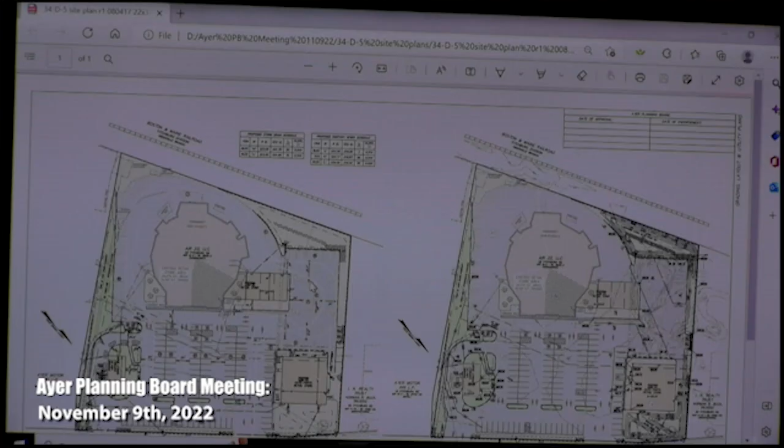Over the last several years, we've been keeping the permits alive, both the special permit and the site plan review. Subsequent to that, as this has kind of sat, we've gone through various renditions of what can we do with this property, since they walked.

One of the things that Paul had looked at, he really didn't like how this curb cut was positioned with the rest of the plaza and the flow. So he said, hey, can we change this curb cut location to here? I said, well, we can do that. However, that requires Mass DOT approval.

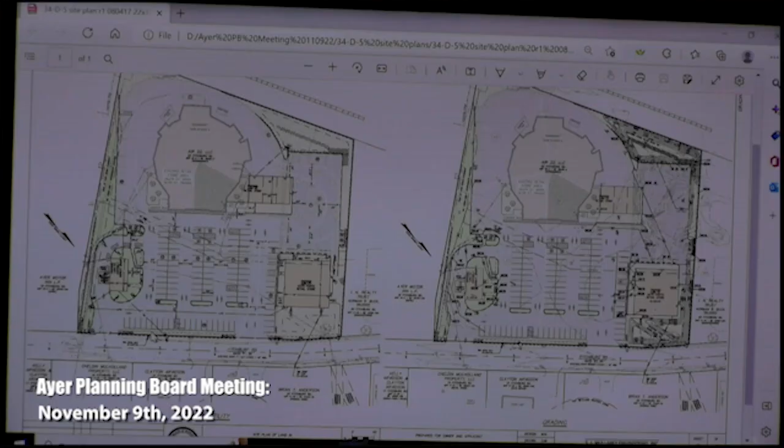So in January of this year, we reached out to Mass DOT, and this is what we had supplied to them. This isn't colored, but we had moved the curb cut location here, left the building, left the auto parts, and left the addition location.

Well, they came back to us with basically a huge laundry list of improvements they wanted done along here, and we started looking at it and got a little gun shy with what they were asking us to do. So I said, well, can we go back to the original proposal?

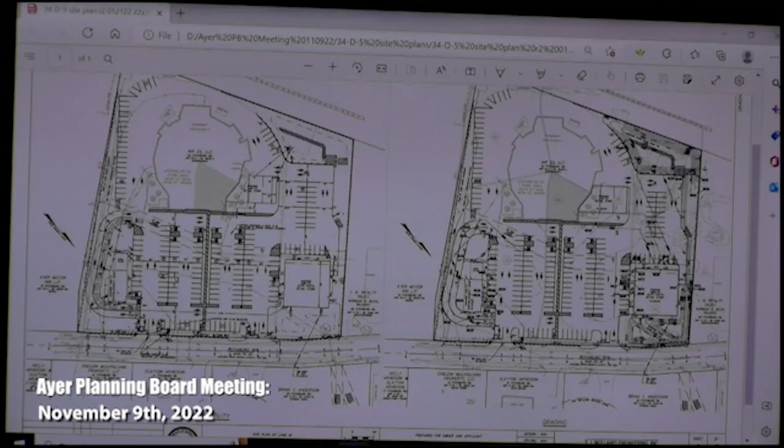So we did that. They said, well, that's fine. However, we need to show it without the drive-through building. The reason is there's an existing drain line that cuts through this property and ties across here. They wanted us to address this drain line before doing anything with this drive-through building.

That's why we approached the board, and kind of administratively, can we phase this project? Since we started, Advance Auto came back in the picture, they wanted this location, can we get this moving, build this portion of the project, put that on hold until we resolve our issues with Mass DOT.

And Mass DOT wanted to see it specifically on a separate plan. They wouldn't allow us to just X out a building not to be built at a later date. They wanted a separate plan, and that's the plan that we presented to you.

This plan tonight, you mean? Yeah, well, this is the phased one. Phase one was this one. Yes, this is the phase one that we have.

I'm just kind of giving a backstory because Member Diskin and Member Tilson were part of that discussion. Does phase one include the retail stores to the side of Shop and Save? Phase one was for this side, yes. Okay.

Is that in progress now? Yes, that's being constructed right now. This portion of it is being constructed. Not the strip area, that's not under construction now, but that's considered part of phase one of this plan.

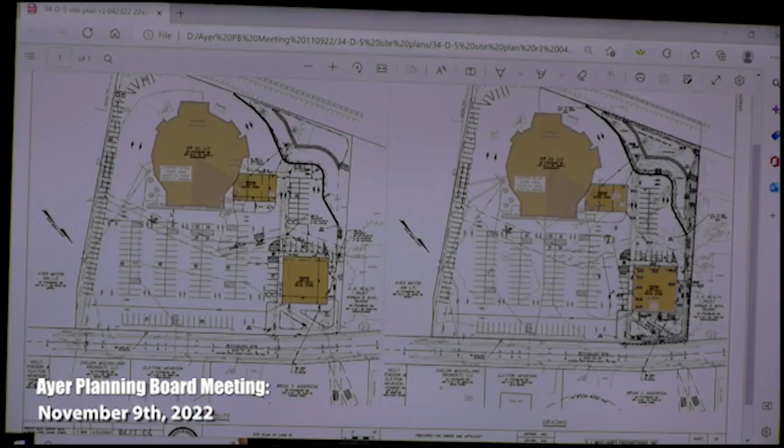It's that same stormwater basin I was just pointing at, the same sewer line, but we are permitting this curb cut change and then the parking configuration, because when we did this in 2017, there was the 2009 zoning, and the parking dimensions, parking setbacks, all your landscaping requirements, all those were different. And even the board members, which boards we're were, this had a mix of a zoning board approval and a planning board approval. Those are now under your purview for site plan.

So this curb cut location -- Mass DOT did not allow us to have the sidewalk. Previously, the sidewalk was shown on our side, on our property, on the Locust property. They wanted us to continue that sidewalk in the same fashion that currently was added in front of the Ayer Motor Inn, and that is right on the edge of pavement.

So that resulted in the introduction of additional curbing, and it also requires retrofitting. There's existing drainage structures, utilities here, an existing catch basin located here. We now need to retrofit that, convert it into a manhole, and have a curb inlet offset going in along here.

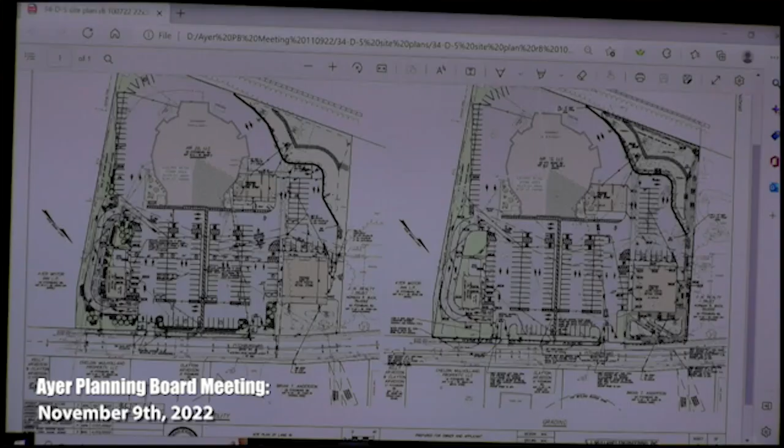Now, Mass DOT isn't requiring the sidewalk, but they said if you provide a sidewalk, it must be in our right-of-way and not on your property. If it's on the applicant's property, it's a long-winded process to get approval -- to get an easement and cross-cutting easements. They do not want people to walk down their sidewalk and then come onto an abutting piece of property and then back onto the right-of-way.

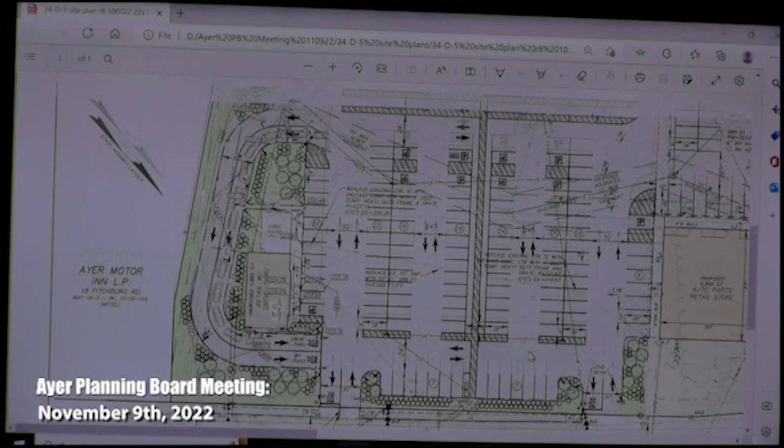So now what we've done on this plan is show the density of what the landscaping is required for the town. And we've augmented the parking spaces from 10 by 20, which was the previous, to now 9 by 18. Since we had to put the sidewalk here, we figured let's balance this out from an aesthetic perspective with the centering of the site. So we're going to put a crosswalk painted through the center of the property.

And that really corresponds to the grade, you can see there's a high point running through. These are the contour lines here. And here, so there's a bowl right here and there's a bowl right here in the parking lot, which those two catch basins connect to.

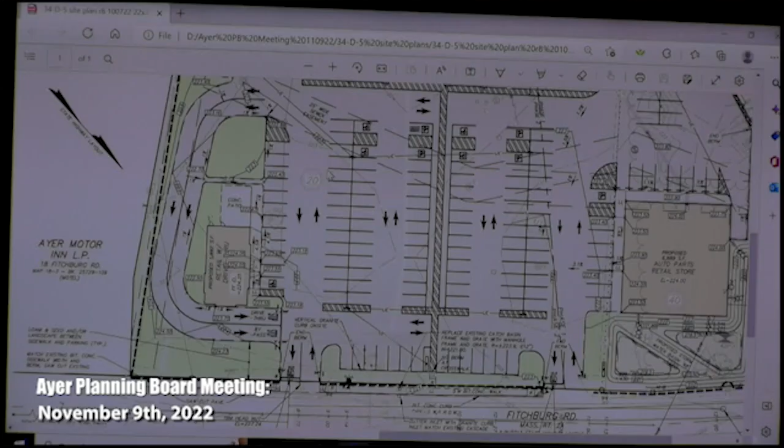Now, consequently, with changing the parking shape, the parking grid, and the parking spaces changing, that affects the positioning of the poles. Currently there's an existing light pole here, there's an existing light pole here, there's one... it's in there somewhere, right there, and then right in that area, right there.

So here we're proposing to put new light poles lined up with how the parking grid's going to be, and right here and right here. Being cognizant that there's a sewer easement that comes through here, and also the town has a sewer easement that goes along here, the main trunk line, and there's overhead wires, power and utilities going through there. So there's kind of a spaghetti of utilities going through the property.

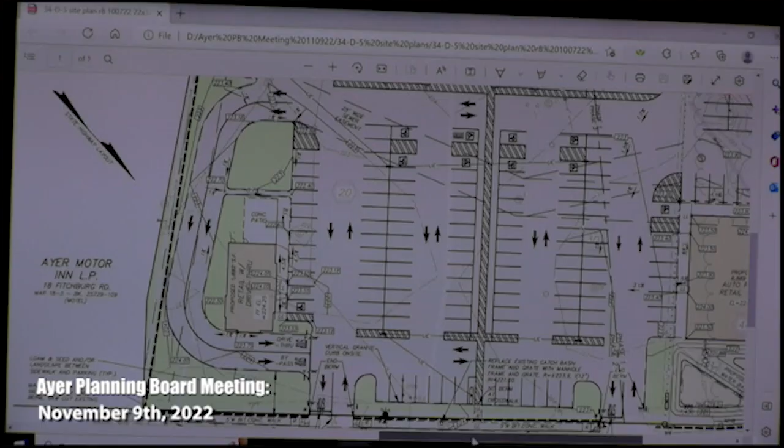So with the sidewalk, and this is another thing, MassDOT did not want a radii there. They did not want a 30-foot radius there. They said this is their preferred layout. That's not cool, but that's how they want it.

Is that about trucks and stuff like that? Well, it's a 30-foot radius, this is sloped, there's going to be a transition detail, and you see how they do it throughout the state, they ramp down, and that's how they want it. So you're telling me that a long tractor trailer with a delivery can come out of that and make a radius onto the highway with that sharp 90, almost a 90, there?

I'm talking about this right here. I think, Ken, if I may, Mr. Chair, the LL, that's sloped bituminous down to the level, that's for the sidewalk, so the truck can roll over the sidewalk without damaging it. I'm seeing it in other places with the advocacy work, yeah, DOT's made some changes. Previously there was a 30-foot radii, and that's what we had, and they said no, we don't want to see that.

Wow. Can't turn south. Well, the good thing is it is fairly wide, as a lot of the streets in Ayer. This is a very wide street, so. And are they required, sorry...

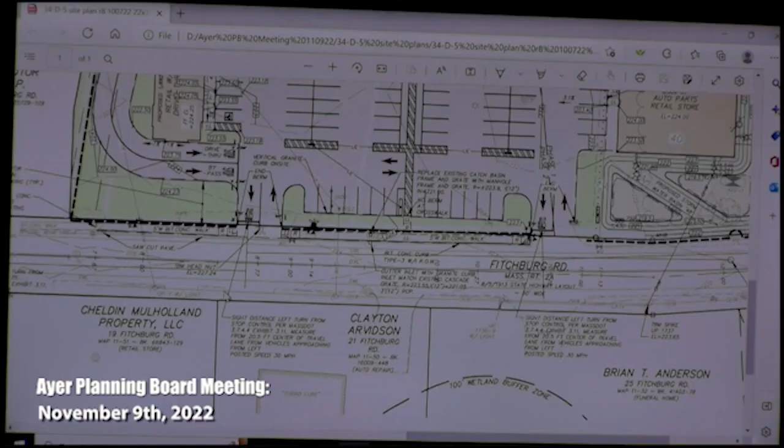It's a quick question, will you be repaving the parking lot as part of this overall project or no? It will be, once we get it, it's being done in steps and phases. It needs a quick patch, it needs to be redone, and that's kind of what really started it, they were hoping to actually do it this year. Let's get our ducks in a row.

The plan is to repave the parking lot next season, change the exterior lights. So we are focused to do that actually next July. Okay, thank you, wow excellent. Yeah, you've lost the season this year. Did they... excuse me, UPS Auto Parts being done this week.

Did Mass DOT require you to put in vertical granite curb as you meet the road? Match what they have, because right now they're doing bituminous. So match the curbing. On the site, once we get in here, we're doing granite within the site. But we're matching what they have here, their curb and sidewalk.

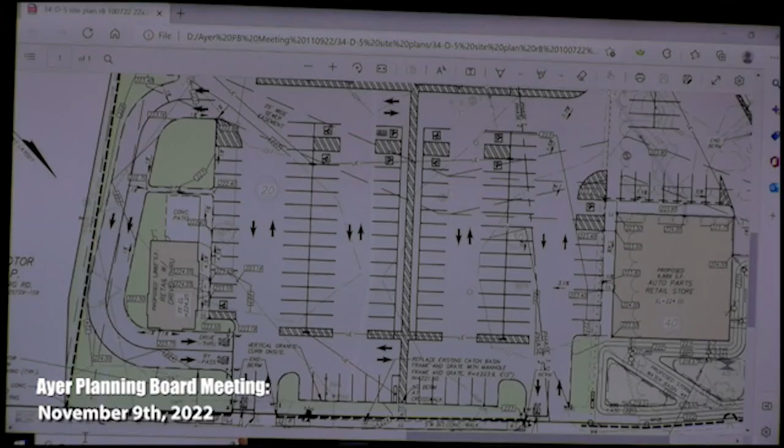Yeah, and they went out and that was a pushback. They initially wanted us to do granite, but I'm like, it's bituminous. Then there was some back and forth, because they were just looking at Google Street View and it looks like it was granite curbing, and I'm like, no, it's not. So some pushback on that.

I was going to say, I'm going to keep going. I was going to ask some questions at the building, but we're down in the front for now.

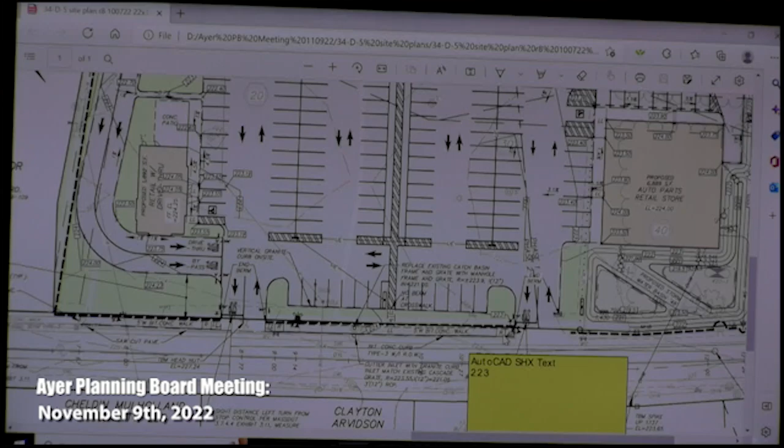Currently, I'm going to slide over to the other view. It just shows the utilities. These are the changes that Mass DOT wanted us to do. They wanted us to retrofit these existing catch basins that are out here with sumps. And actually, the structural integrity of them, that's starting to...

It's unhappy too. What was that? Who knows? Start again. At least it's not talking to us. I don't know what that was. New Acrobat feature. I don't know what that was. Yeah, who knows?

So where was that supposed to be? The retrofit on the sumps, you're adding sumps and retrofitting catch basins. There's a catch basin here and here, which we're retrofitting, adding a deep sump.

They had us go through their litany of various LID options and all the permutations of what can be done. Based on the elevation of the site where the groundwater table is at on that property, it's very flat, very shallow. Implementing all the LID techniques, you really can't do it. But what you can do is reduce pavement, which we've done, and introduce the deep sumps with the oil and sediment trap separators.

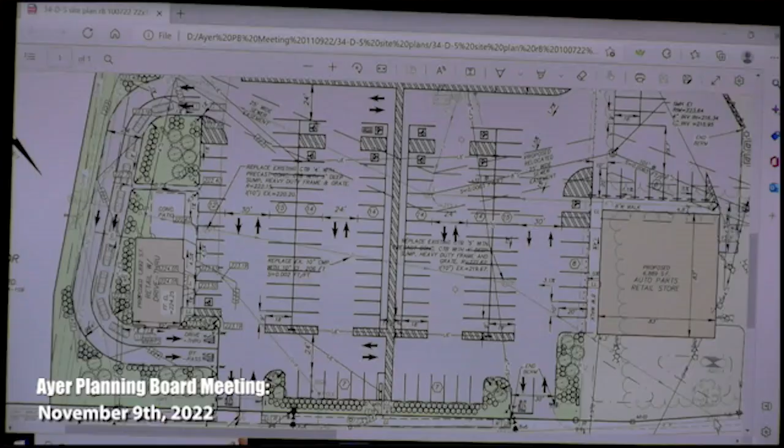We had to apply for a separate permit for that explicitly, and it runs with the property. It's going to be recorded and be basically part of their deed. When title's done, that drain can exist. So that's separate from the actual curb cut application, but we made all the improvements onto one plan. They thought that would be best, to just have everything we're proposing to do on one plan.

And so they're asking you to put sumps in, gas oil separators in the sumps. Yes, so you're introducing the cleanest water you can off the property into their system, and they probably gave you a maintenance requirement. Yeah, there'll be their maintenance, because of their MS4 permitting and their EPA standards, and one of the things that... yeah, so they were satisfied with that.

We went through the various options. There was some back and forth on what could be done, and we showed how much pavement we've reduced, and they were satisfied with that. Even implementing additional structures out there, like Stormceptors or oil water separators, the problem is the height of the structure, and actually getting it to physically fit. Even these structures, we had to raise the grade a few inches just to get a retrofitted precast structure put in, because when this was built in the 50s...

It's probably barrel block, they paved it as they left. So getting a modern precast structure and frame and grate, we had to raise it a couple inches, but really we're limited ultimately by the final discharge point, how much we can raise the site.

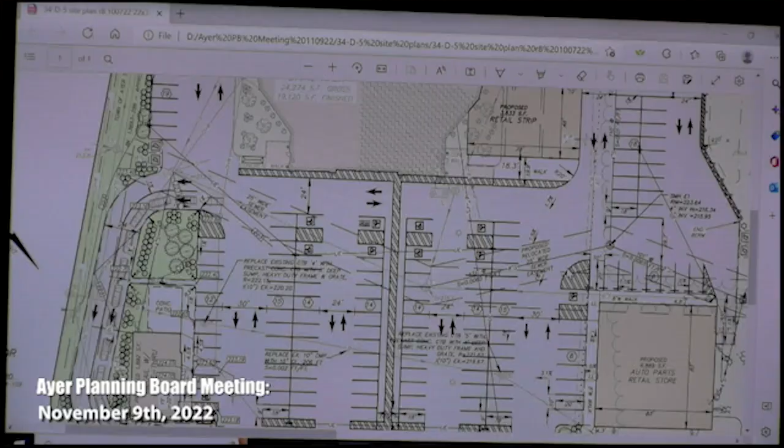But not this, what you just described, the requirements to change those. Yeah, and DOT was satisfied with the basin in the back, that it does not impose anything, nor would it be a benefit to them for dealing with the drainage issues and the drainage woes that we have on the site and the surrounding area.

Can you take us over to the slide that shows the retention or detention basin, by the auto parts store? Because I'm looking at the drain line you just showed, and that drain line is low to that work.

Because it goes right across, in the other drawing it went right across that. Yeah, it's going right here, there's a little hump there. That's to cover that pipe. Everything is shallow. That's why that high point is in the middle, I was curious about that.

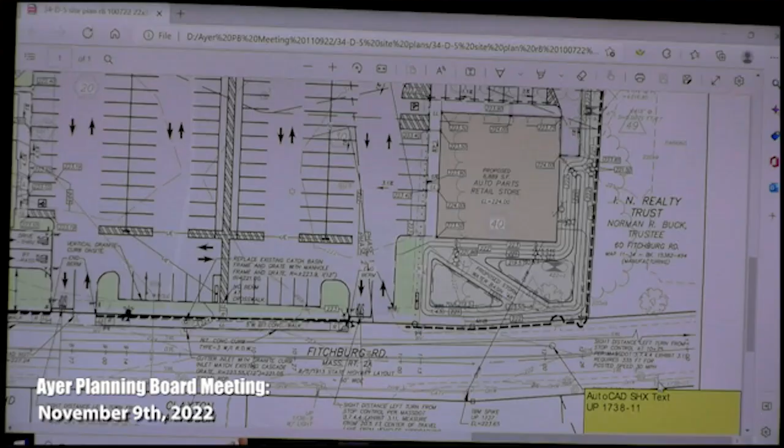It's very shallow, and what that area is doing is basically just catching the roof runoff in the front. In the back, all the parking lot and pavement is sheet flowing to the back. So the connection where it says RD up on the back is the roof drain coming into that.

Initially, the older information we had said this used to be a clay pipe, and over the years that's another reason we were really concerned. When we went out to do some measurements, we realized it's actually a cast iron pipe, so it's really shallow but from here it's cast iron. That gave me a little more comfort that we're not going to crush that pipe as we're putting that building in. That was one of our concerns.

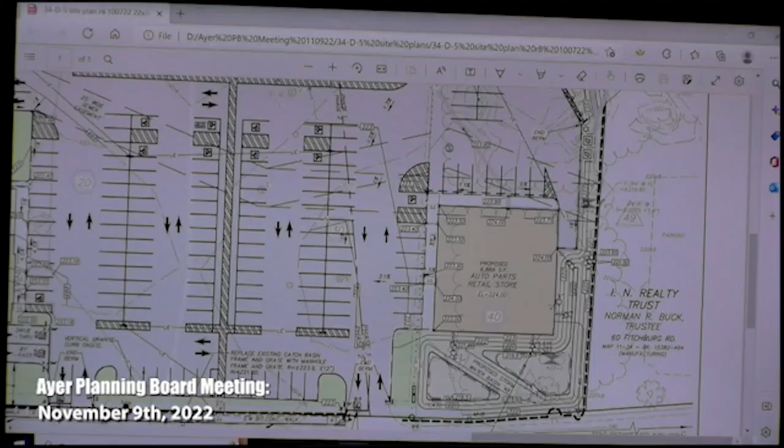Can I ask a question about the back of the property? As I recall, when you guys were here way back when, one of the things we talked about was snow storage during winters, though we're not getting a lot of snow now. But I don't recall what it was back there, but you're still maintaining the area back there as was requested before for snow storage.

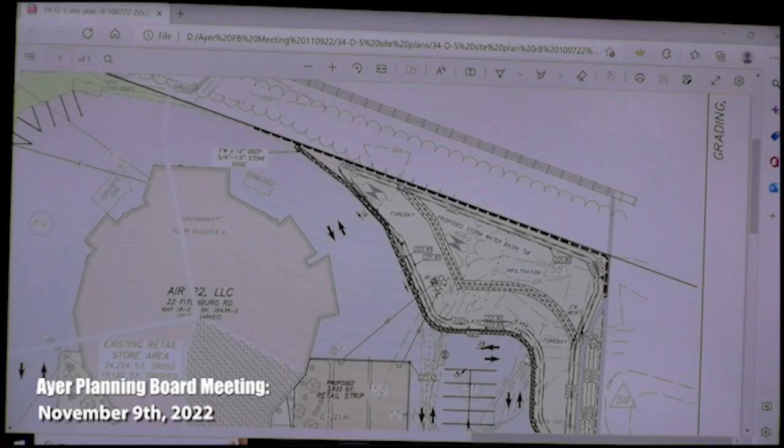Yeah, and usually what they end up doing is leaving areas as they plow, since we have more parking than needed, so they sacrifice some parking areas. I'm just curious because if I recall, that back right-hand corner was the area selected for snow storage in the original plans. We talked about it. So nothing you're doing is going to impact that. No, you're not putting any fences or anything like that there.

Thank you. Should I go?

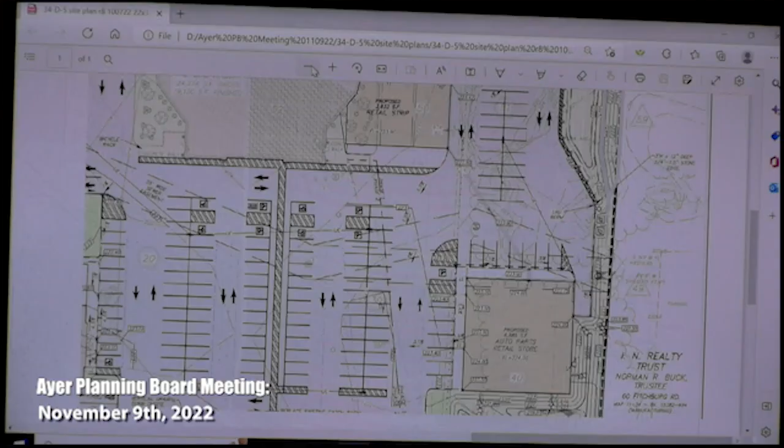Is he complete, Mr. Cooper? Did you have more? No, I saw the memo that Mark had prepared, summarizing the before and after from 2009 zoning to 2019 zoning, with impervious coverage, open space, and parking. The parking is a range - previously we had 166 parking spaces, we have 169 now, so three more than before, but they're smaller spaces, which accounts for that.

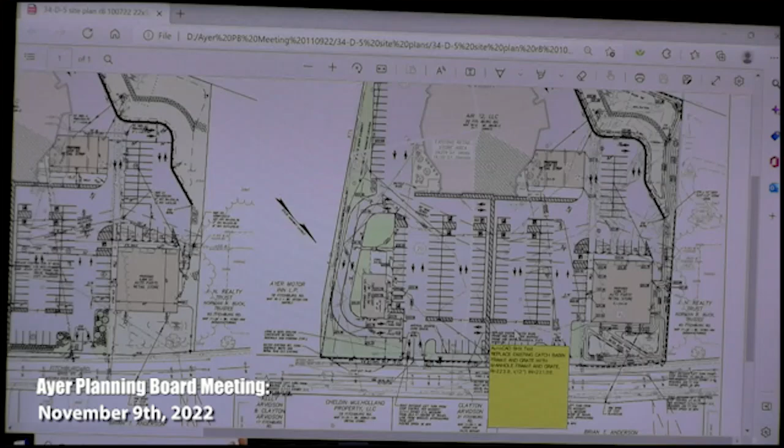And our overall pavement footprint is less than before, based on the stormwater basin becoming larger, and the landscaping and how we did this curb cut. This is all pavement today, so that'll be all landscaped with less runoff into their drainage system, which they were happy about, since it's a sandy material in the area, really conducive for recharge.

Okay, Mr. Chair? Yes, please. A little bit of process. First step would be for the planning board to accept the application package for consideration. The checklist is right in the packet I sent, very thorough as always. I recommend acceptance of the application for consideration first. Then we have two potential waiver requests, one of which may now be moot, which I'll get to after the acceptance motion. And also recommendations from Dan Van Schalkwyk, DPW Director, that may affect the outcome on the conditions.

Mr. Chair, if you want to move to accept the plans as presented? Excellent, do I have a second? I don't have the paper in front of me so I can't give you the actual address. I think it's 22 Fitchburg Road, site plan approval modification. I printed it up but left it behind with my notes. Do I have a second? Seconded, thank you, Mr. Disco. Any discussion?

Hearing none, move to vote. Wait a minute, this is a public hearing, isn't it? This is just to accept the plan, not to approve it. I have one question when you have a public hearing.

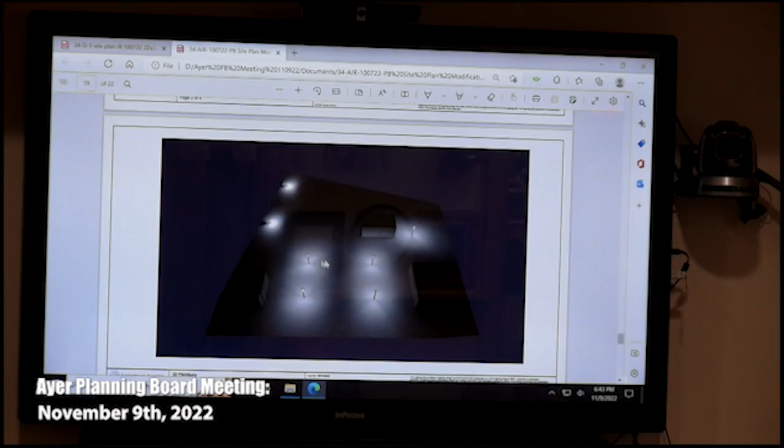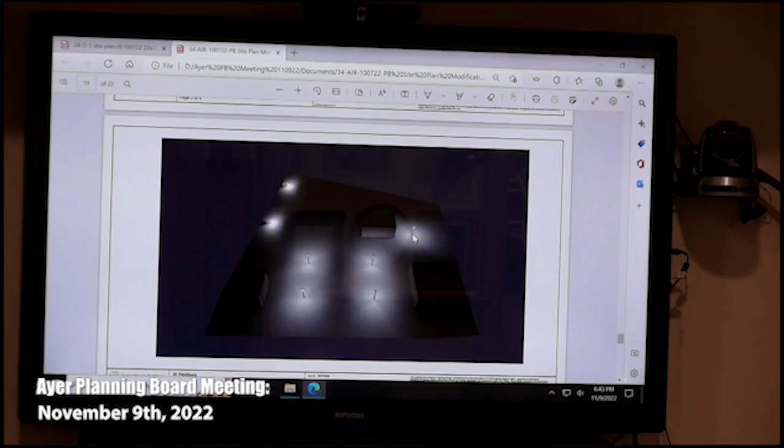This is just to make it clear. We have 4 30-foot light poles here, and we're looking to reposition them basically. That was only, well, it's technically a waiver to do that. The other poles on the property would be 15 foot on the edges, but replacing the existing tall poles with LED. The poles that are out there now, you can see the bulb, just the style of fixture, the current lighting, it's more shielded, more directed down, so you're not getting the off-spill. So it will be dark sky compliant. Correct. So the only issue is 15 feet versus 30 feet, 30 feet is where it currently is.

So you just said you're going to reuse the poles, but you're going to change the fixture heads, basically, that's what's going on, right? The lighting heads themselves, or are you just going to convert them to LED? Well, I think you'd want to, there's over 60-year-old poles. So everything's getting changed? They're going to get changed, correct. I thought you said reposition the poles, but I guess you didn't. Reposition where the lighting poles are located. Got it, the base is going to be scrapped. So it's all new stuff? It's going to be new, but it's going to be matching the existing height. Yeah, got it, thank you.

And there's 4, part of your discussion was the fact that there's 4 light heads on each one of those poles, right? Correct. And now they're going to be with the LED light panel, there's going to be double heads. Okay, thanks. So it's actually a reduction in actual light heads, but just the efficiency of the light. So those are going to, what we're seeing there now is only 2? Double heads, yes.

This is showing the lighting, though not the lighting that goes around. There will be wall packs, wall storefront packs lighting, and shielded down wall packs, though it doesn't show the grocery stores with the glass front. This is just to give an idea what the new lighting will give, though it's not the complete picture. These are the new structures, basically, and showing what the new proposed poles will do for electric.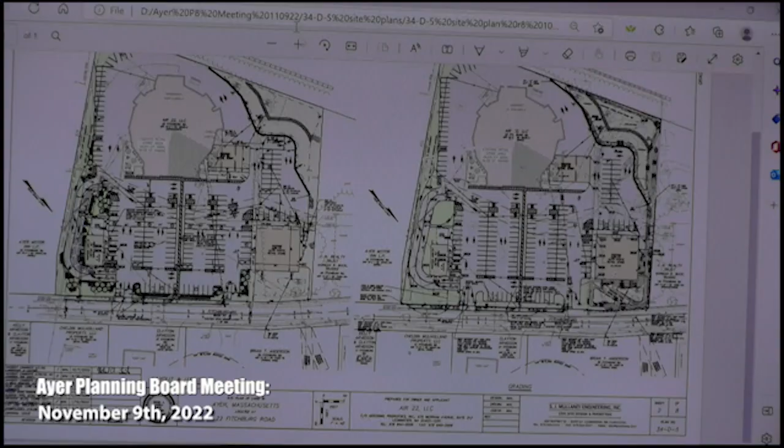We have numerous existing utilities. There's currently a sewer easement coming through here with a sewer line, and there's also a sewer line in here. There's an existing fire service line located here which ties into this corner, which we're retrofitting and moving over.

Once the addition goes in, I don't know what that thing is. It's not working right. Is that an internet problem? You gotta have some fun, Mark, or we're not gonna stick around. All right.

How am I getting... let's see here. Plans. That's okay, we understood that. Back to there.

Oh, I remembered it. So we have an existing drain line that runs through here, and we have existing sewer lines. If we put more poles out here, it becomes problematic with the existing utilities. We'd have to double the amount of poles out there, maybe even more. That's additional cost on top of the improvements that Mass DOT is requiring us to make in their right-of-way, which they're not compensating us for. So we need to introduce sidewalk and curbing and retrofit the structures where they want them versus where they are now.

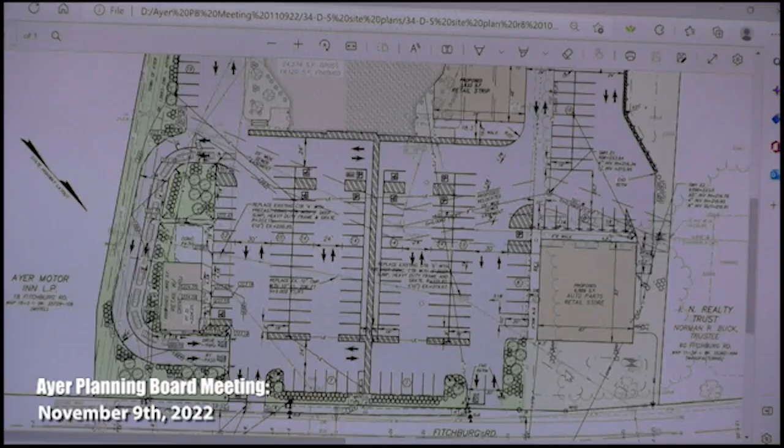The town ordinances apparently require a shorter pole. Do we really have a real need to go to something that tall, which is atypical of the town?

I'm good with it. Well, I think there's a little confusion here. We're not seeking a waiver, it's grandfathered in, so that waiver really is not needed.

That said, we do have a motion to vote on this waiver. There's no need for a waiver because it's grandfathered in. Right, though I think Jeff made a motion.

If the waiver was in the papers, if it is at the desire of the applicant to withdraw the request for the waiver, I will withdraw my motion. No, I wouldn't do that.

I'd say, Mr. Geronimo, that a waiver would be granted if there were no change in the poles, if they stayed in exactly the same location. But I think we're good with the discussion we're having right now. I think the town needs to decide if we need a waiver or not. We were told it's been there since 1956, and that it's standard in Ayer codes, that it's grandfathered in.

Mr. Chair, to speak to that, it's a better product having 4 poles instead of tripling the number of poles. This property is going through a major redevelopment, and it is a better project for that corridor than it currently sits. We're only asking for the 2 waivers. We're now having less light pollution than the current lighting that was there in 1956. You walk by there now, you drive by there now, and the bulbs are open. These are directed to a certain spot.

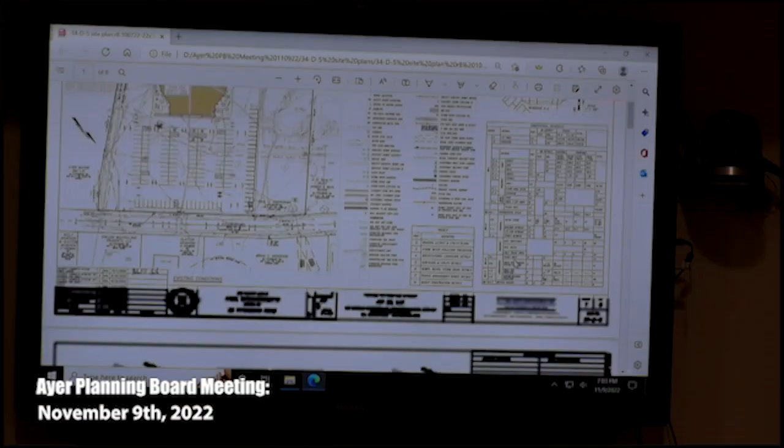Previously it was very benign what we had. Now there's a density, there's a number of shrubs. It's a planting list. The current zoning requires...

The current landscaping requirement is one tree for every 10 spaces, and there's 98 spaces, which requires 10 trees. For frontage, it's one tree per every 25 feet, and we have 358 feet of frontage, so that requires 15 trees. Shrubs and bushes are based on 12 per tree, so with 15 trees total that results in 180 shrubs spaced throughout the site.

So we had a greater density previously. We had 20, and we're now at 27.

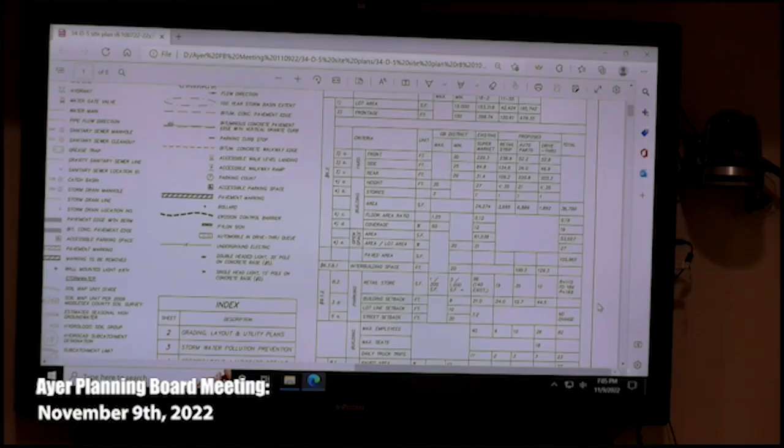So the section you're referring to is in the zoning bylaw regulations, right? Section 9, yes, general regulations, 9.1.9, I think 916 or 9.17 — yep, okay, here, thank you, I got it.

Mr. Chairman, can I just ask, the 8 bicycle spaces, are those near the main strip, or are they at the auto place as well? Just curiosity, I don't want to derail our conversation. I placed them up here.

Because with the phasing and the contract we had, the negotiations were phased with AutoZone in agreement with an approved plan. Then as we discussed earlier, once we went out there to satisfy some abutter concerns, we had to make some retrofits.

I won't have to lock my bike to the bike corral or any tree further anymore. Discussion from the board before I open up to the public?

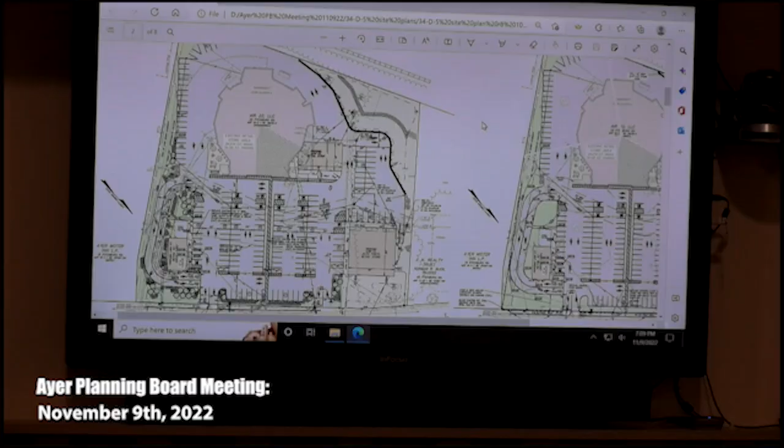Yes, Beth? I definitely support strategically locating trees within the parking area to reduce that heat island effect. It's a very large parking place. I certainly appreciate the extent to which the pavement is being removed around the perimeter. It's quite an eyesore right now, and this will be a significant improvement. I certainly acknowledge that and appreciate the effort that's gone into the design. But I do really feel like it would be a huge missed opportunity if we don't put some trees within the large parking area. I also would like to see another - I believe right now, next to the sidewalk at the roadway, it appears there are 2 street trees in that inner island between the driveways, but I really think a third located in the middle there would help a lot as well. And maybe I'm not looking at the plan accurately, but I only see them kind of at the sides close to the driveways and not in the middle stretch along the roadway.

And then I also think that there's really a need to buffer the stormwater basin from the roadway. Right now, the grading is completed there and it's just not an attractive view at all. So I think there's a lot of potential for adding some shrubs at least along the stormwater basin area between the roadway and the basin. That would be a tremendous improvement aesthetically from the roadway. And it's something that we can see right now already, the circumstances there and the omission of any landscaping in that location on the plans before us tonight. So just a few thoughts.

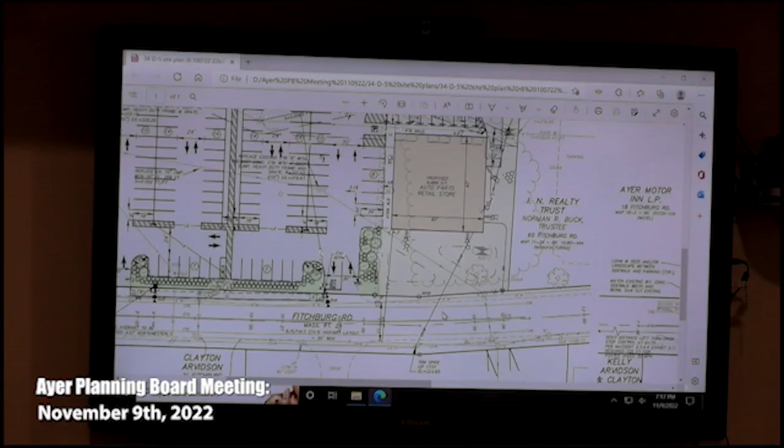Mr. Chair, if I may. Yes, please. So I'm the liaison to the Affordable Housing Trust for the Planning Board. What we're looking at, and what the town unanimously voted on October 24th, was money CPC funds for phase one of a project that will have 102 units. They'll be mixed 1, 2, and 3 bedroom units.

They will be adjacent to the Anderson Funeral Home project. Yes. They're going for funding in the next 6 weeks. We hope that they will get funding in this round and that within the next 24 months they'll have 60 units built.

So you've got 60 units of people coming to your store. So if I can say something like, maybe we could find a couple bucks to move a gate valve, I would put that plea out there, please.

And it's a condition that it's agreeable to Mass DOT. Well, I understand it needs to be agreeable, but we're building housing in this town hand over fist, and it's right in your guys' front yard. I appreciate that it's cost, but this was not even on the horizon in 2017. No, there was no sidewalk in 2000.

This has drawbacks in some people's eyes. It is an improvement in others' eyes, and we're doing stuff farther up the street from you, where those units are going to be there forever if the project goes forward, and we're working hard to make that work. The town put almost $500,000 down on the table the other day for them.

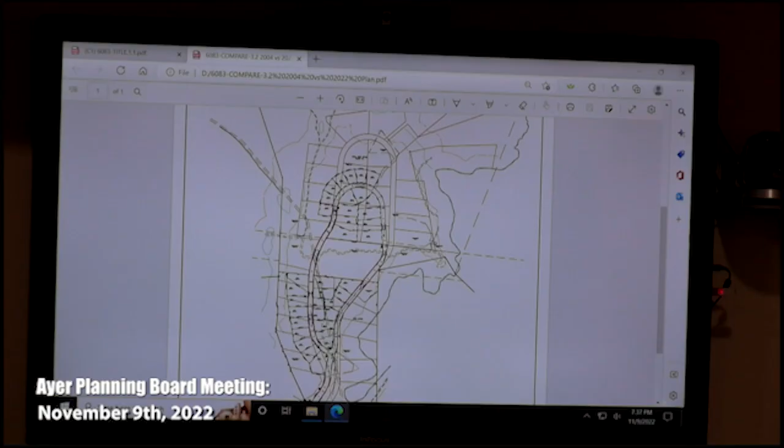I think they took an enormous amount of time discussing this with the reviewer they had engaged, and also took an enormous amount of time walking the site and reviewing the material we submitted. I respect their opinion, but I think this design is a pretty good compromise and also speaks well to your bylaw. So that's our feeling on it. And again, it's very subjective.

Bob and I actually met with Lauren at Natural Heritage yesterday and talked about several things with the site. One thing we discussed was the power line easement, and I know one of the points in the report was about protecting that easement because it's a wildlife corridor. She agreed with that, but didn't see the need to do anything specific like a wildlife tunnel. She didn't feel anything like that was necessary.

She agrees that habitat and wildlife will go back and forth across there, but with the limited number of lots, she didn't see it as rising to the level of needing specific protection for wildlife at the power lines. Did you get something in writing from her about that? No, not yet. This was just a meeting we had yesterday, actually going over turtle nesting areas.

Before we see you next time with the definitive plan, we'll actually have submitted for a modification of the CMP based on the preliminary plan, so we'll have something in writing from her at that point.

On that subject, we did speak with her about the turtle nesting areas and identify a place she thought would be appropriate, which would be up about where that triangular shaped area is, wouldn't it? Right up in that general vicinity, yeah. Right up in that general area.

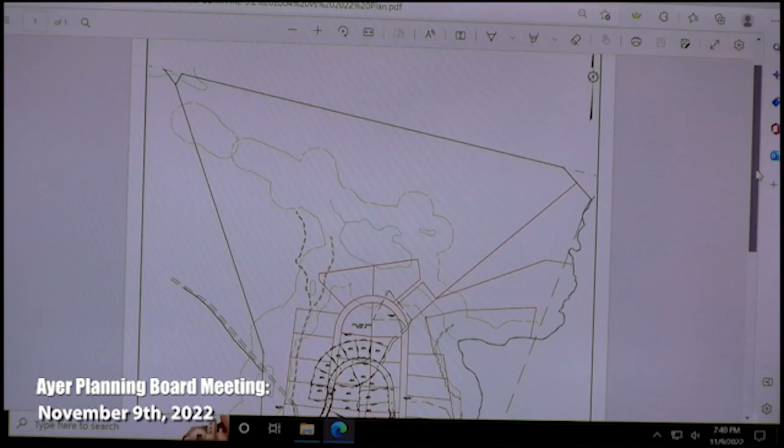The other thing, and this is a pedantic point that'll be interesting: the back area, the substantial acreage, is intended to be gifted to Mass Department of Fisheries and Wildlife. I'll actually probably put a declaration or restriction on it, but also an easement to enable the Ayer Conservation Commission, assuming they're amenable, to have a maintenance capability of that turtle nesting area that we would actually then endow.

Okay, but I'll talk to the Conservation Commission about that also. We'll resolve that before we come back and see you with a definitive plan.

Mr. Dills, did you want to add anything? No, I think Bob covered most everything.

Ken, I just want to double check, is this a plan we've had before? This is the comparative plan he prepared as a comparison. I thought so, but I also have the summary composite plan. I didn't copy every single plan sheet onto mine, but this is the actual plan.

And the power lines we're talking about are now bisecting top to bottom. Correct, north is to the left and south is to the right. Got it, okay.

So one of the issues that Concom raised — you want me to go back to the other one? Yeah. So one of the concerns they raised was over here, protecting this area because this is where the runoff would go to Long Pond. But in your revised plan, those lots have been removed, so I'd say that's moot at this point.

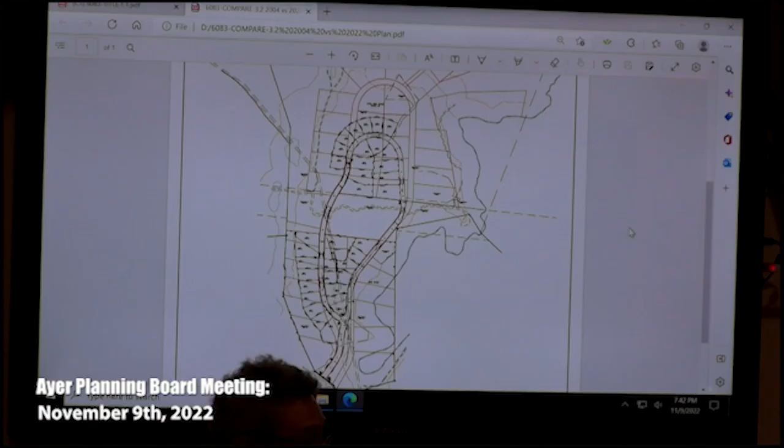That's right, so the area of greatest controversy that I see is really the issue north of the power line. That's where I think is the heart of this. And you earlier articulated that trying to squeeze these lots down here would put you all the way back.

Don't touch it, you can't get close to it, Jan. Can't even get close, I'm sorry.

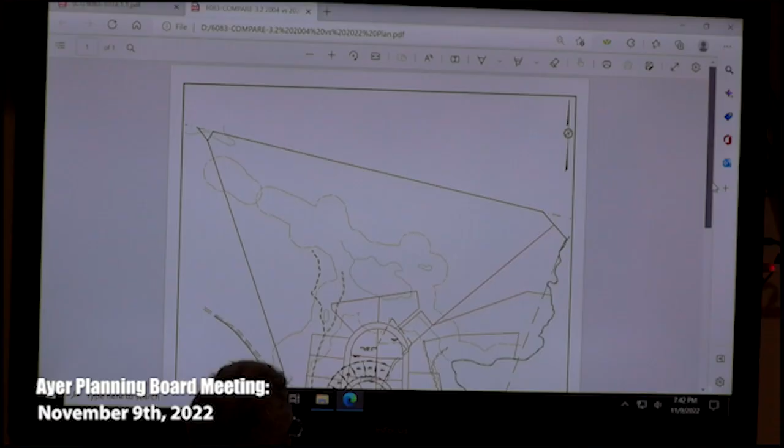So just vaguely here, what does that mean — building more lots here, and on the right, on the pond side? Well, no, we don't want that. In fact, that's one of the conditions of Mass Fisheries and Wildlife, not to build over there.

Right, those are not to be built over there, that's correct, it's in the Conservation Management Plan, at least the original. That was the part south of the power lines, but they never addressed at that time north of the power lines. Correct, I'm talking south of the power lines. Okay.

And there's difficult topography on the left-hand side too, as those lots are deeper, it drops off quite a bit. There's a lot of ledge, very challenging to walk over there, requires blasting and things like that. Very steep. So as I say, I do believe it's a compromise. And there's a wetland, a brook there as well, or an intermittent stream, I guess.

Did the board wish to make any further comments before I open it up to the public for any comments or questions they may have? Okay, yes, Ken?

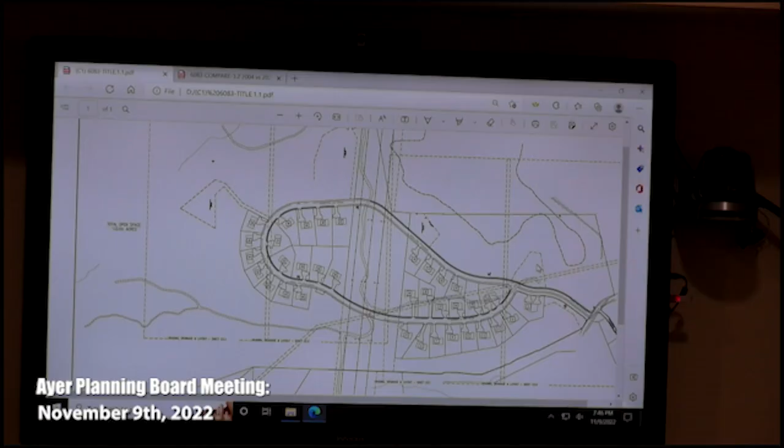As Bob said, once we know we have a configuration that everybody's happy with, we will go back out and do soil testing to find those places. Anything we can do to keep it as close to that side of the road as possible, or on the other side of the road, we intend to do. Okay, thank you.

Any other comments from the public or questions? Mark and then Marion, but Mark had his hand up first. Mark Phillips, Mount Laurel Road.

With regards to what we just discussed around trying to keep everything off that side, the west side of Long Pond, and any runoff - I think it would be highly desirable, just as the lady in front of me was requesting, to sacrifice a lot or whatever just to move that onto the other side of the road. It almost looks like a one-for-one spot from where it currently sits to the lot right opposite it. You're sacrificing one house, but keeping a pristine lake in good shape.

Unfortunately, it's not as simple as that, though - it depends on the soils. Everything to the west side of the road going in is very ledgy, solid rock. As you drop down and get closer to the pond, the soils get better and better. So everything inside the circle there is pretty much ledge, or very shallow soils. So it wouldn't be suitable, it just wouldn't accomplish that.

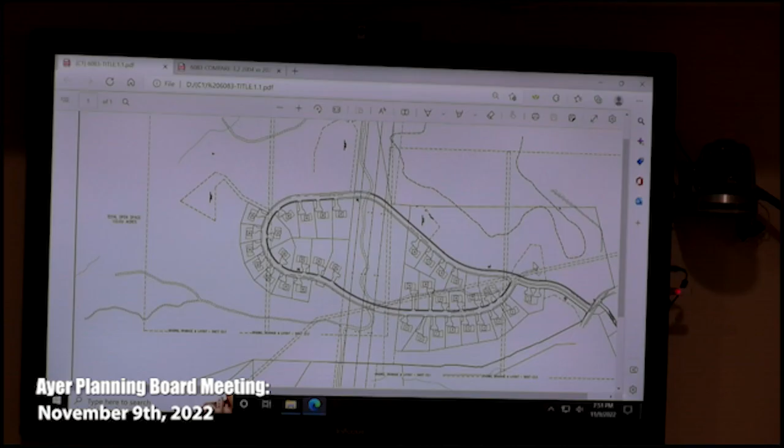Okay, could I say one other thing that might alleviate some of the concerns too? You know, those drainage areas are actually lifted off of the prior definitive plan, which had a lot more road, so a lot more impervious cover. But they happen to be areas that we know had already testing that was suitable. So we're certainly going to look at it and see what we can compress a little bit further, given that there's less impervious cover with this plan.

There's probably about half the pavement, because this is much narrower and a lot shorter. And the former requirements were for much wider pavement, much wider road, and I think it was longer, 46 feet I think. So just the changes that were made have reduced the pavement.

I'm not going to jump on your side of the game right now, but the smaller lot size also makes a lot less turf, a lot less runoff on turf. I'm hoping to see more extensive shrub and tree for holding water as best as we can.

Thank you, Mr. Chair. Again, low impact development. My second question then was, has New England Power already been approached about the crossing of the right of way? Yes, on multiple occasions.

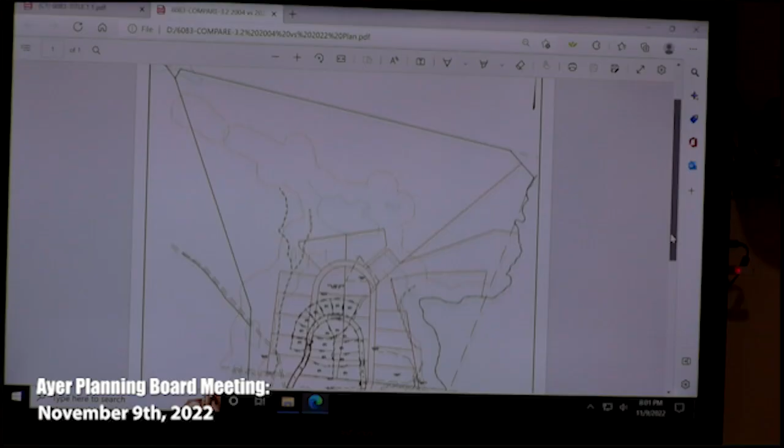You have to assume that you look at building a realistic subdivision road, which they extended up into this open space here, and I forget what the exact number was, but it was probably in excess of 100 lots. No, wasn't that many. The yield plan we did, based on the constraints of the CMP from Fish and Wildlife, was 35 lots.

The requirement under the new OSRD regulation, if you choose to use the reduced location of the lots and smaller lots and less frontage, you get the count by creating the yield plan based on the existing underlying zoning, which requires, in this case, a 1 acre lot and 200 feet of frontage in a road that is similar to that.

So in just an amazing coincidence, the subdivision that was approved many years ago had that same requirement, because that was a requirement back then and it hasn't changed. We just incorporated it into the yield plan today. So to get the same count, you could put a road out there with 200 feet of frontage in front of each lot and a 1 acre lot, and you'll come up with about 35 lots.

So the mathematics restricted it to that yield plan. Now, they have the additional ability under our zoning regulations to get bonus lots, which they chose not to apply for. So for instance, for every excessive - was it 5 acres, over 50%? When you get over 50%, so much more you add, you get more bonus units.

Because they had so much open space, they were allowed to increase that yield plan by bonus, getting bonus recognition for it, but they chose not to do that. So we basically settled on the same number of lots. And we put on there a couple of two-families. So we ended up with 37 units.